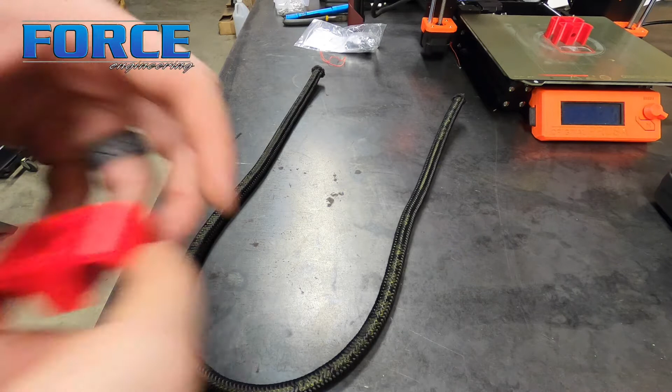Alright, now I got these guys printed. Pretty simple little deal there. But I got a piece of trans line, see how they fit. Check that out. So there, you get them in there all the way.

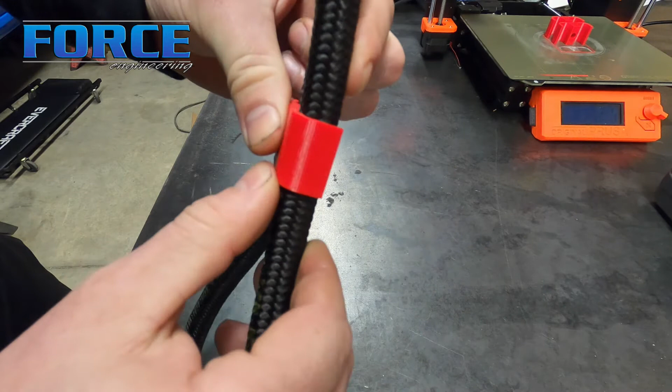Well, these aren't designed to hold them directionally, they're just literally designed to support the weight. So yeah, looks like they'll do that pretty good. I'm gonna climb under this thing and put some nut certs in there and bolt these up.

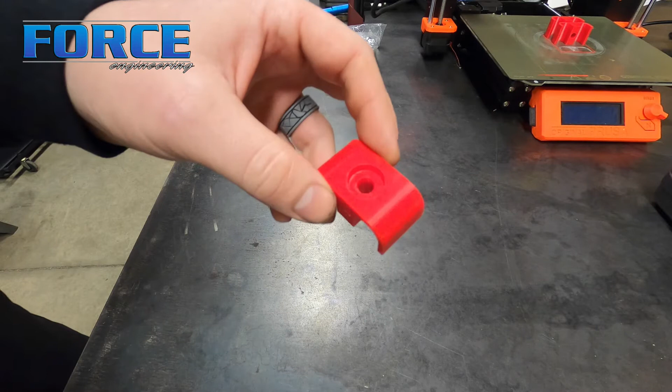One thing I did do that was goofy is I went to the hardware store and I just got some normal Allens. I apparently should have got some button heads because the Allen sticks down below the bracket a little bit, but you know, whatever, it's not that big a deal.

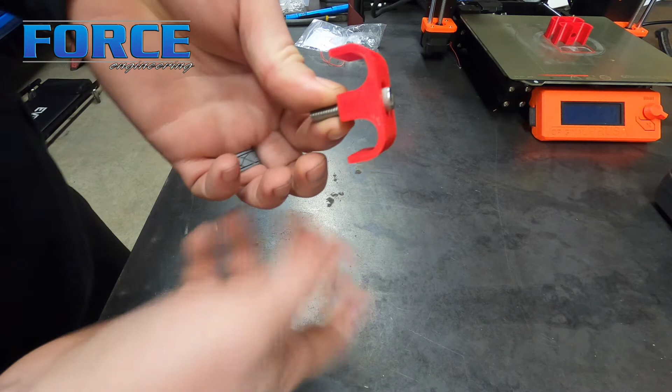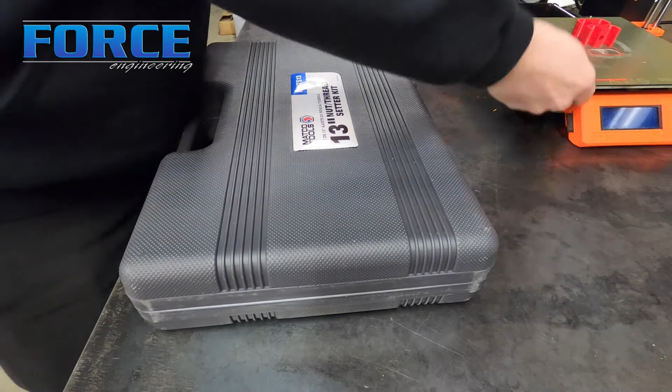I don't know if you guys, a lot of guys aren't familiar with the nut cert stuff. And honestly, I didn't know about these till a couple years ago. So I thought I'd move my 3D printer. I thought I'd show you guys this thing in a second. This is a Matco one, but there's several different types.

So this thing here is what the nut cert actually is. This was a serrated one. They have these in different styles and whatever. But basically you drill a hole through whatever you're gonna insert the nut cert into, and then the tool threads into the nut cert, pulls this down, and it ripples this like much like a pop rivet, holds that in place, so then I'm able to add threads to the bottom side of the car.

So that's what I'm gonna do. I'm gonna drill holes, I've made 3 of these mounts, hopefully that's enough. Pop 3 of these nut certs in there and then bolt those brackets up, and then the trans lines will be up and out of the way. So yeah, I thought you guys might think that was cool if you weren't familiar with them.

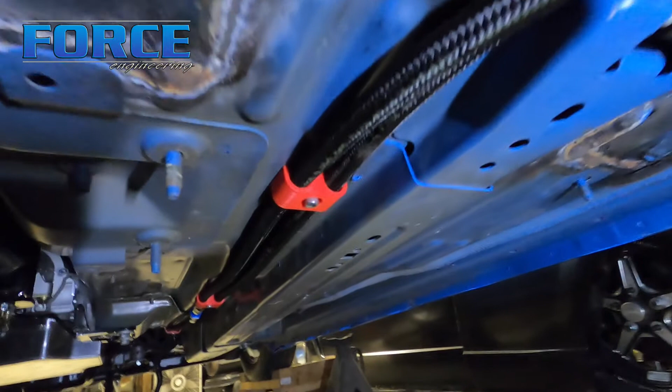Alright, check these out. Did a pretty good job of tying them up there, I think. Sorry, I'm rolling on my creeper. Ride's a little bumpy. Lines are a touch long. It's hard to see. It's not blocking the light, but the lines are a touch long.

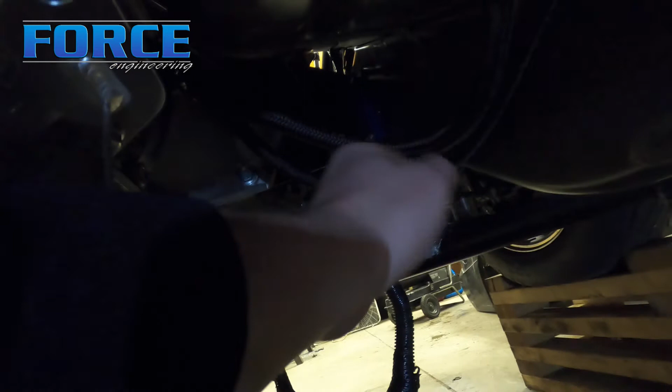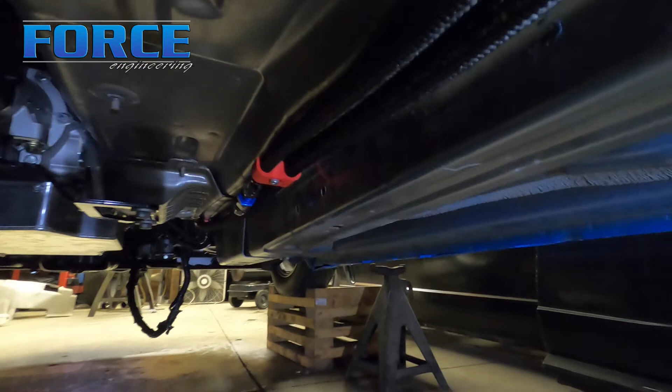I could shorten them up a little bit, but they'll work for now. Maybe I'll move them a little, take some slack out of them on the other side here, but yeah, I'm happy with those brackets. I mean, they're bright red because that's the only color ABS I had on hand, but yeah, they'll work. So I thought you guys would think that's kind of neat, having a 3D printer and a little bit of skill on CAD. Very little CAD skill. Definitely comes in handy for projects like this.